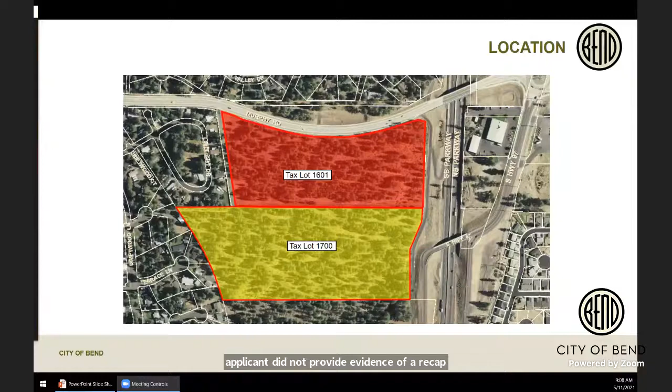First, the project site is comprised of 2 units of land. As described in the recommendation, only tax lot 1700 was found to be a legal lot of record. Tax lot 1601 was separated by deed after Deschutes County adopted their partition ordinance, and the applicant did not provide evidence of a recorded survey or land use action for that land division. A full analysis, as well as possible remedies, are included in the recommendation.

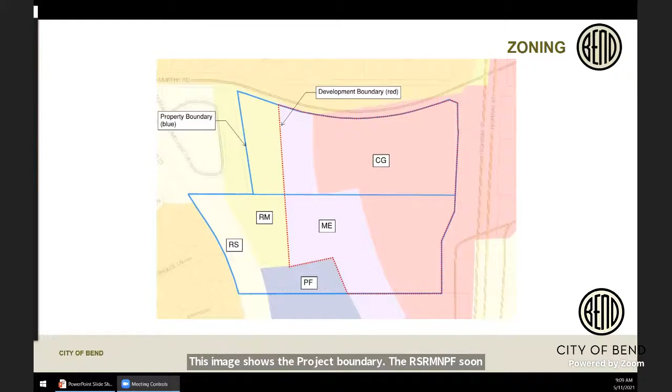For clarity on the scope of the site, because I know this is a little confusing, this image shows the project boundary. The RS, RM, and PF zoned portions of the properties to the west are not included in this application. The project site is only the ME and CG zoned areas.

So the city is recommending denial of the application for multiple reasons, and I won't go into detail about each one as they're all included in the recommendation, but I will cover the items with the greatest impact.

First, the dedication for a roundabout at Murphy Road and the frontage road. The frontage road will eventually provide access to the properties to the south of the site, which are all currently undeveloped, as well as be the primary on-off route for Highway 97 in this area of town. Construction of the roundabout is not required under this project because traffic counts do not meet the construction mitigation failure criteria. However, the need for intersection improvements are anticipated as the area develops.

Additionally, this roundabout is shown on the Murphy Crossing street plan map. The applicant was provided with the opportunity to submit a conceptual design for the roundabout at Murphy Road and the frontage road, and they did not. They simply stated that there's adequate right-of-way, but without illustrating how that existing right-of-way is sufficient for a roundabout.

That additional right-of-way is for a large drainage swale on the north side of Murphy Road. It's not simply excess right-of-way. Because there's an existing water well nearby, which I'll talk about more in a minute, underground injection control stormwater solutions like your typical catch basin or dry wells can't be used. So this swale is serving a purpose in that right-of-way to the north side of Murphy Road.

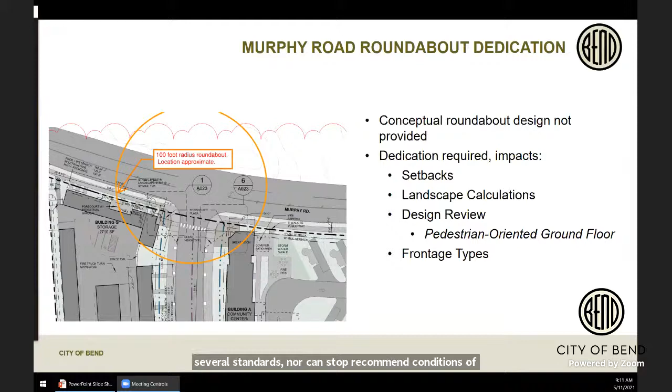Further south along the frontage road, the Murphy Crossing street plan also requires a roundabout at the intersection of the frontage road with B Street.

The applicant's proposal doesn't generate the high number of vehicle trips contemplated by the refinement plan, but it is the first proposal within the Murphy Crossing refinement plan. Therefore, there's an unknown number of trips to be generated by future development in the area, as well as by the future extension of the frontage road to Highway 97.

Construction of the roundabout is not required, but to meet the standards of the Murphy Crossing street plan map, the applicant must adhere to an assumed setback for the roundabout. An assumed setback is less impactful than dedication because it doesn't alter the site area, so calculations like landscaping aren't affected. But adhering to the setback will require that sites B and C are redesigned somewhat, which ultimately can affect the setback and possibly the design review and the frontage type.

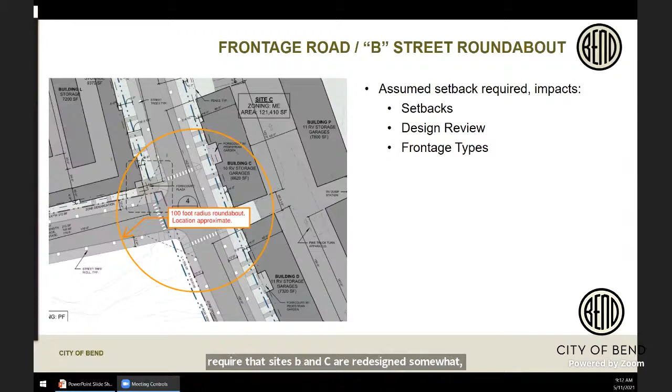It was determined that the proposal does not produce enough trips to warrant full street widening of Murphy Road, but a left turn pocket is required, which will require some street widening. First, the traffic analysis memo required a 100-foot turn pocket, and the applicant is only proposing 73.5 feet. I want to note that this was incorrectly stated as 56 feet in the recommendation, although it is still short of the traffic analysis memo requirement.

Second, the civil plans submitted with the proposal do not address the impact of street widening. The relocated curb on Murphy Road, which would be part of the street widening, requires a cascade of improvements which the applicant has not sufficiently illustrated, such as the relocation of catch basin inlets, effects on the drainage swale to the north of Murphy Road, relocation of sidewalk especially in relation to manholes, and reestablishing the landscape strip. The applicant is showing curb-tight sidewalks, which aren't permitted.

The quantity of variables associated with improvements to Murphy Road are too complex to condition, so the special street standard for Murphy Road and the related findings were found not to be met.

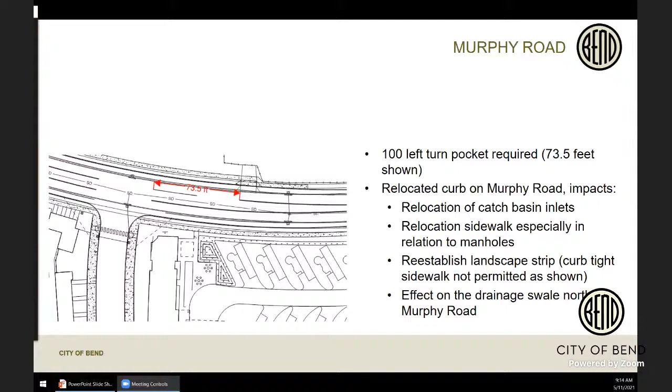The applicant is proposing a 60-foot right-of-way for the frontage road and to construct it to the local special street standard rather than the collector special street standard in an 80-foot right-of-way as required by the Murphy Crossing street plan map. The number of trips associated with the development does not change the functional classification of the roadway, nor can the classification of the road be changed through a limited land use decision or a permit. An amendment to the TSP, and in this case the Murphy Crossing refinement plan as well, would be necessary to change the classification in special street section.

The collector standard specified in the refinement plan requires bike lanes, sufficient lane widths, a turn lane or median, on-street parking, and widened sidewalks. The applicant did not provide sufficient information to determine how or if a partial street width can fit within a 60-foot right-of-way, therefore not meeting their burden of proof.

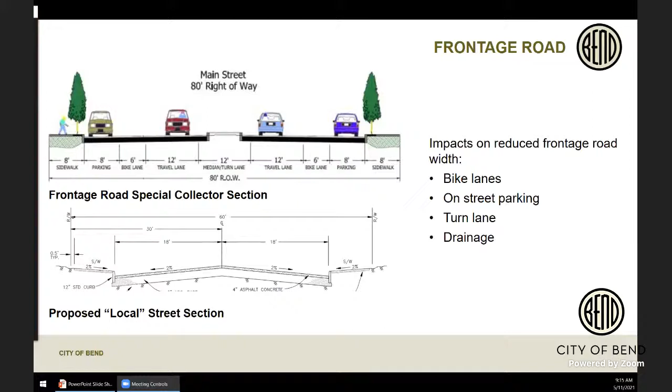Public right-of-way stormwater solutions were also not addressed by the applicant. As mentioned earlier, an existing water well in the area causes a portion of the site to be located within the 2-year time of travel. Underground injection controls are not permitted within a 2-year time of travel area, so swales are likely required. If swales cannot be fully located within right-of-way, either additional right-of-way is needed or the swales may be located on a private site, but they may conflict with building footprints or other elements of the site.

The applicant did not illustrate that the existing swale north of Murphy Road has sufficient capacity for the additional impervious surface from widening Murphy Road. Without additional information addressing stormwater runoff and drainage in the public right-of-way, the associated standards cannot be found to be met and present too many variables to condition.

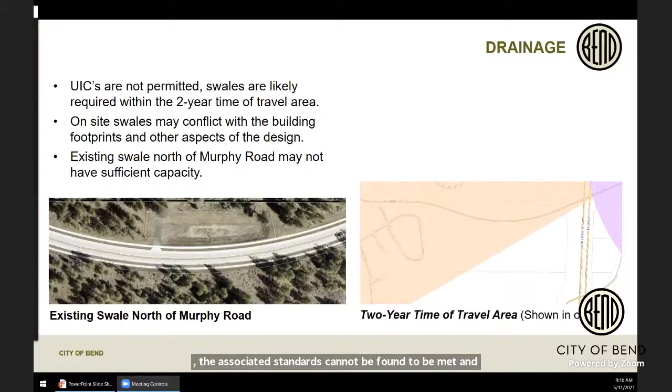Last, I'll briefly summarize a few other not-met standards. Regarding tree removal, staff was not able to find a single tree indicated to be protected. Rather, the trees are either unmarked or indicated to be removed. Therefore, it's unknown exactly which trees will be removed versus preserved.

The block length and perimeter standards for the south half of the site were not found to be met. Portions of the public plazas, the elements integral to making them plazas, were located within clear vision areas.

Comments from private development engineering stated that some street intersections are askew. Streets must intersect at a right angle as much as practical, which may affect setbacks and siting when remedied. I'll note the Murphy Crossing refinement plan allows streets to shift up to 30 feet without an amendment.

It locates the campground out of the ME zone where it's not a permitted use. It basically follows the zone line, which isn't shown on this particular slide.

By jogging the drive, an existing sewer manhole is placed within the curb line, and to meet the block length and perimeter standards for the portion of Site D north of this access drive, staff recommended a sidewalk along the south side of the access road.

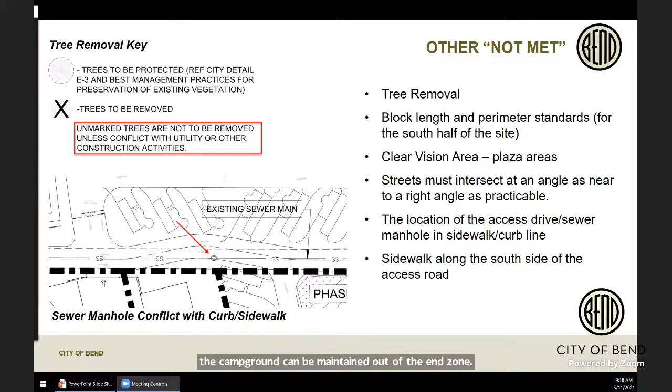In conclusion, staff recommends denial of the application for the reasons described. And if other city staff has anything to add, I'd like to turn it over to them at this time. Thanks.

Thank you, Ms. Anselin. Are there any other staff members, Mr. Henningsen, or anyone else on staff, Ian, that wishes to testify in support of the city's recommendation?

I would just like to further clarify Sarah's stance on the need of the collector street through there. As clearly identified by Sarah, not only the master plan or the overlay area of the project clearly identifies that as a collector, but it is absolutely known, even in the current TSP that the city adopted recently, that that road will be a connector to 97. It will eventually be the main connector over the highway connecting China Hat and Ponderosa and bringing further traffic into the area, further clarifying the need for that roundabout.

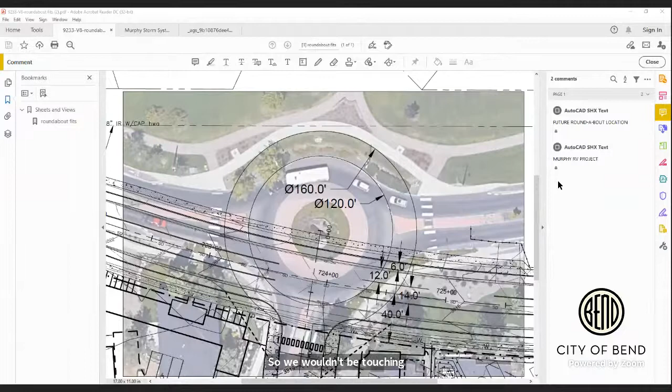If you come over here to this area where my cursor is now, that's the edge of the fence for the drainage, so we wouldn't be touching the drainage whatsoever. I'll go into the drainage in a minute, I have another exhibit that'll be better served for that.

If you come down to the bottom here, this is our existing development with our buildings and everything. This circle that goes around here is an 80-foot radius, 160-foot diameter, and it would fit right in there with all the improvements we currently have without a problem. It's a busy exhibit because we superimposed it all on there, so I thought it might help to walk you through it. When I first looked at it, I'm like, holy crap, what's what. The rest of this road is the existing Murphy Road.

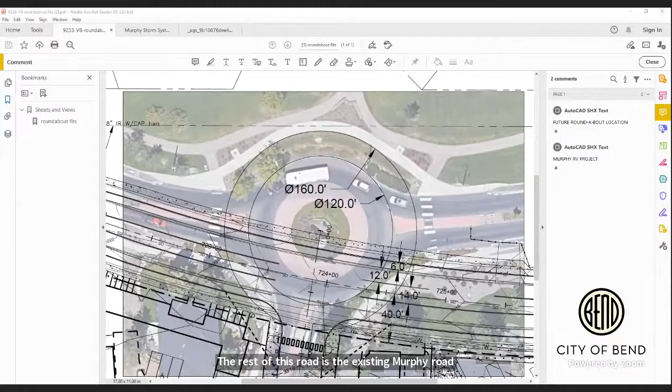If we go to the next item, did that pop up where you're seeing a new screen? This is Murphy Road, and this is that drainage system. As you can see, it goes all the way out to Brookswood. So all of this purple that comes down over here and comes over to where it says Murphy Road, that's the drainage basin that's being utilized, on the north side of Murphy Road. And if you see this little jab right here, that's where it goes and gets injected into the big swale on the north side.

Up in this area of our project, we've got a storm drainage that we're planning on putting in. Let me back up here, you can see this is ginormous. We're talking about adding 73.5 feet by 13 feet wide. Compared to all of this, that is nothing in comparison.

So in the event that we needed to, we have lots of different options. One is if you come over here, you see the basin right there, and that stub into it's about right here. There's lots of room here, and room on the other side to expand if needed. If that didn't work, we could take this catch basin and put it into our storm drainage over there. That's just what we do every time when doing design work once we have a land use approval. I've never had to show storm drainage on a tentative plat or site plan approval. I don't understand.

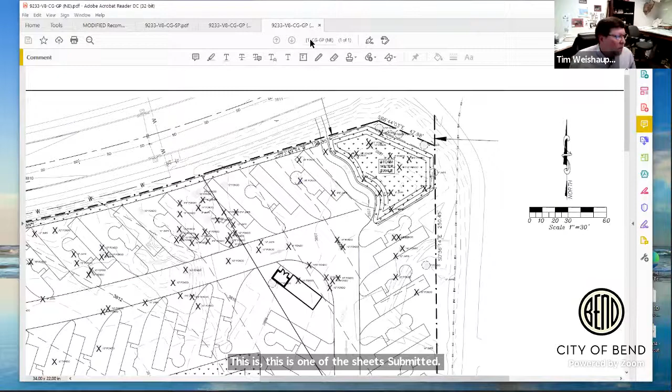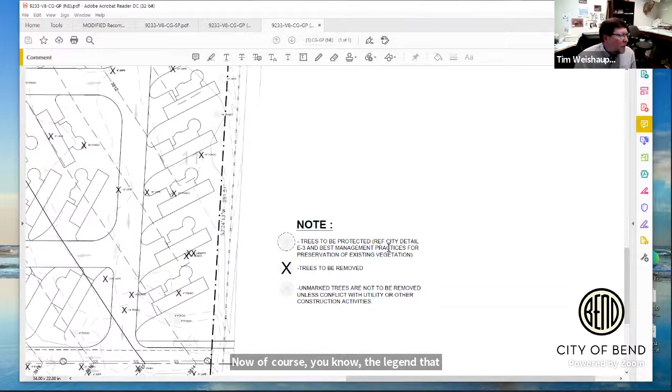Just first real quickly on the tree plan, this is one of the sheets submitted. I didn't upload them so I don't know if they got renamed, but this is part of our tree submittal and grading plan. You can see a few things on there, some trees with circles, some with X's, some unmarked. Let me see if we can find an unmarked one. There we go. In the legend it's pretty clear the effort's being made here, and I don't know what's not real clear about it, except maybe there are too many X's, not enough circles, or too many left blank to provide comfort level, but we think it's fairly clear. We do have existing contours in the background here and proposed new contours in general.

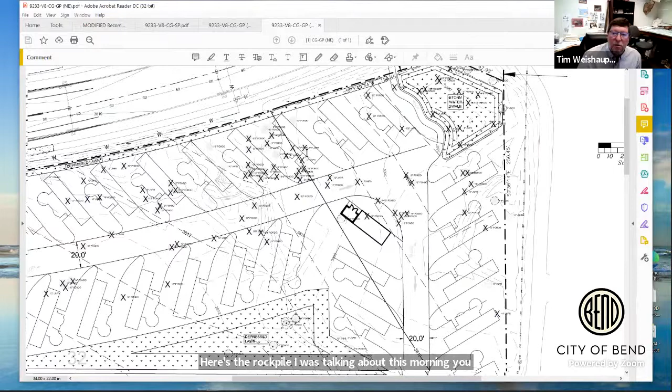Here's the rock pile I was talking about this morning. You can see the contour relief there, and the fact that if you're going to put drive aisle across there, you're probably going to need to do some blasting and grading. You might be able to bring the road up, but again, this isn't design level detail provided at this juncture.

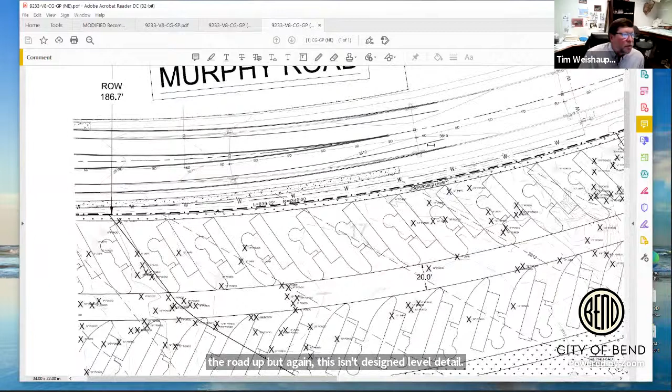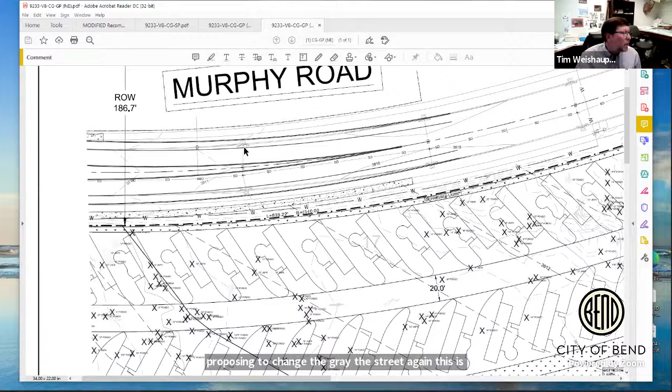You'll also notice up here on Murphy Road, there are existing contours. The existing sidewalk, our proposed widening up here, is shown on the site plan. If you look at the existing contours and the fact that we're just moving the curb line from there to there, we're not proposing to change the grade of the street. This is a simple widening, move the curb out a bit. There's no major grading proposed.

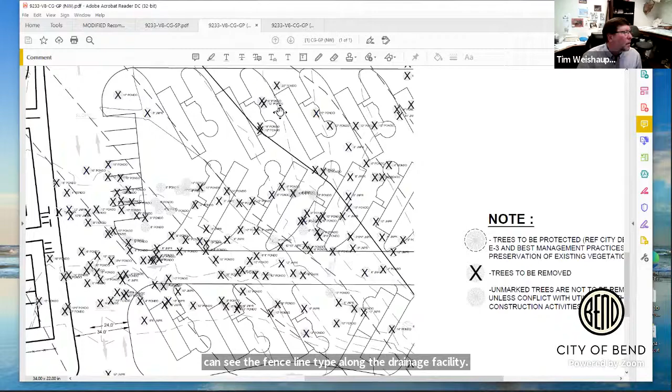You can see the fence line type along the drainage facility. Let's go to the next slide. Continuing on, you can see the fence for the drainage facility and the driveway. Again, just a widening is all that was proposed there.

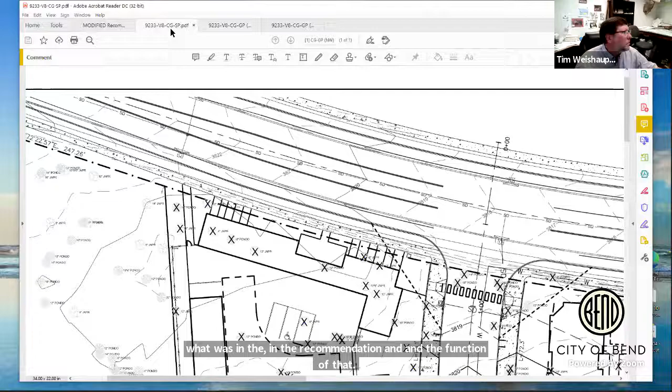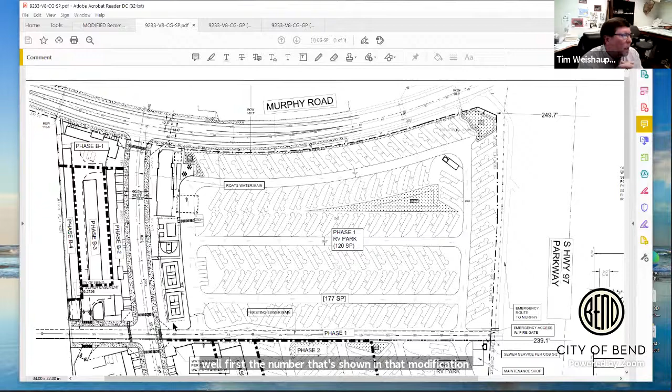I can touch on the block length too. I was looking at what was in the recommendation and the function of that requested public access across the site. If you take a look at directions of travel, where folks are trying to go, or what staff is saying is going to shorten the block length or make it in compliance - well, first, the number shown in that modification or in the recommendation and the exhibit in the recommendation doesn't make the block length comply. It's still too long on the perimeter.

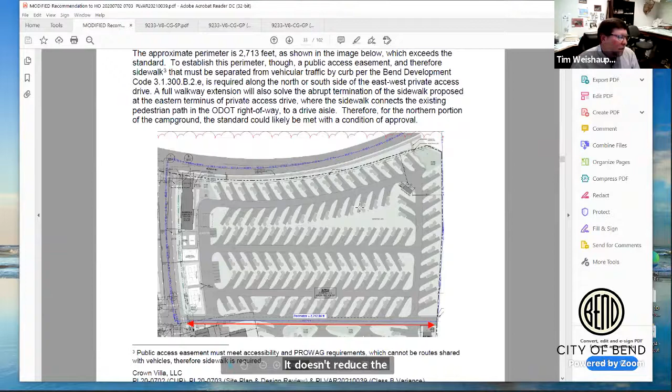But if you look at point A to point B, any way you slice it, it doesn't reduce the direction or length of travel, or direction or convenience. And when you look at it, it doesn't meet the code, and the code says 'may,' not 'shall,' provide a pedestrian access. So there's no destination on the parkway. I figured that was worth mentioning and considering because it really doesn't function realistically at all in the real world.

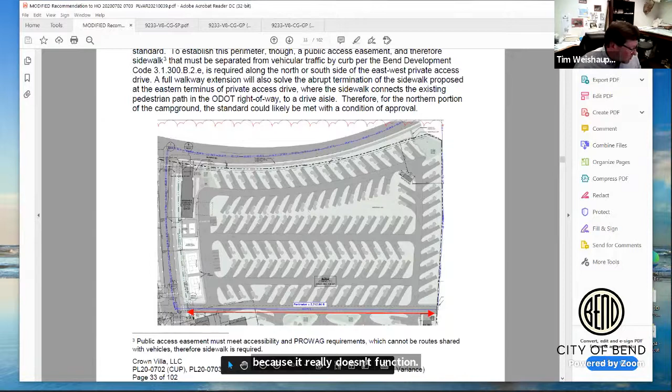Trees block - I think that covers it, unless you had any more questions, Stephanie. Thank you, Tim. No, I don't at this point. Mr. Kine, did you have anything further you wanted to say before we talk about leaving the record open?

No, I stole Tim's thunder, and then Tim stole my thunder about the sidewalk going through the middle of the project - it goes to nowhere, it just goes to the highway. So if we put that through, we might be saving somebody's life, that they don't want to go over there and jump in front of a car. So I say we shouldn't do it.

Hey, those are nice flowers, by the way. Thank you. Mother's Day.

All right, okay. Well, thank you everybody for your testimony today. I wanted to go over the leaving the record open.

Before I do that, I'm going to actually read the summary. I think Sarah did a good job on page 4 of the revised recommendation. Item number 6 on that talks about the application acceptance date.

I'm going to skim past some of the earlier stuff. There was a modification of application on January 7, and a hearing on the modified application took place on March 16, 2021. I mentioned that at the outset of this hearing today. At the hearing, the applicant requested continuation so they could submit another modification of application to the site plan and design review and to the conditional use permit applications. That was submitted on the 30th of March, and there's a 120-day review period which ends on August 4th.